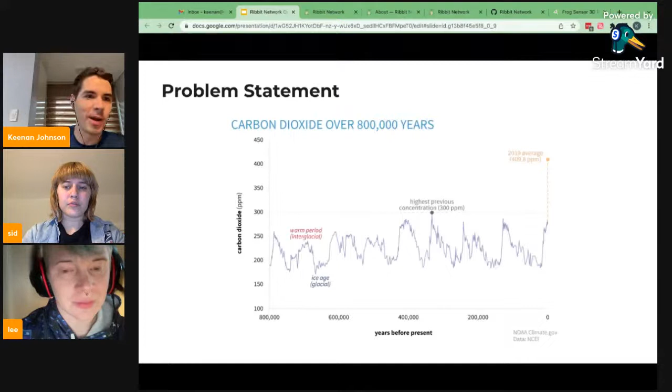And climate change is really interesting because we know exactly what is causing the problem. It's greenhouse gases. There's no real debate about that, and it's just about solutions. So at Ribbit, it's like, hey, we should have that future based on open data that allows everybody, citizen scientists, governments, corporations, to both take informed action, but then also be held accountable for that shared action, because climate change is this big shared resource for the earth that we live in.

Can you talk a little bit more about that idea of citizen science, and why is it important to you that individual people can have access to this data, as opposed to organizations that we trust and love?

Yeah, I think it's important for a lot of reasons. One is that we've known climate change is a problem for a really long time, and one of the reasons it's not solved is it's not any one entity or person's fault. It's this collective, really big systems problem—corporations have some part to play, us as individuals have some part to play, governments have some part to play. We've all historically been part of the problem, and we all need to be part of the solution moving forward.

And are there ways that individual people can look at this data that have a different vantage point or perspective than other organizations might?

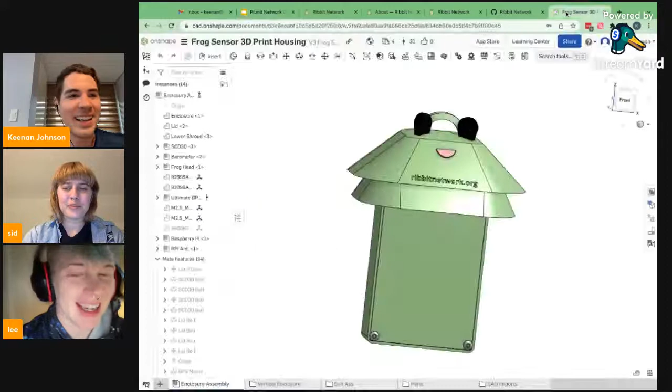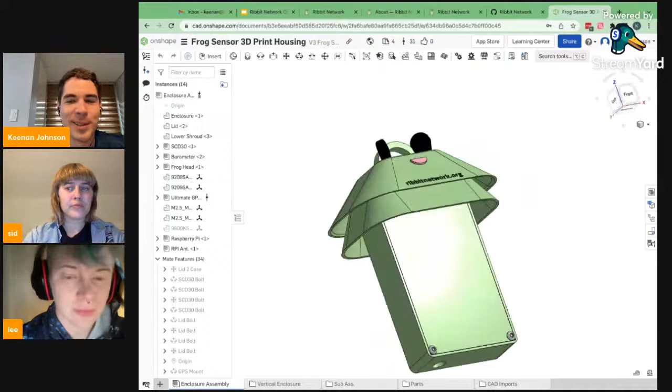We have all of the mechanical and electrical design files hosted and available. We use this program called Onshape, which is a great CAD tool for open source projects because it's freely available for public things. Anybody can use it for free in your browser, and you can go in and fork the mechanical design if you want, which is exactly the same as the GitHub concept of fork, and modify it and take it and make it your own.

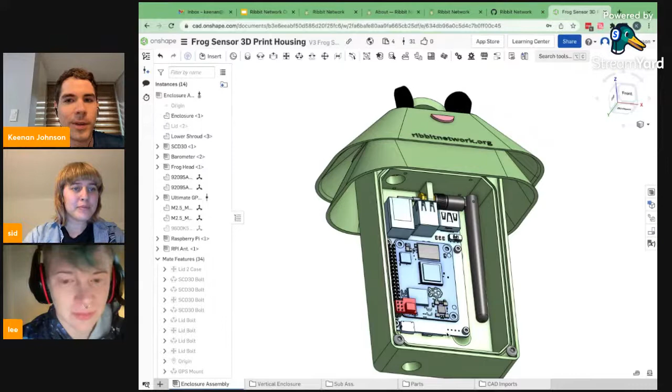So it's perfect, and we can peel this apart real quick. Inside of the frog, we have a classic single board computer. We use a Raspberry Pi CM4, so you can see it here on the carrier board alongside the big antenna. The big antenna is really important here.

The reason we use the CM4 today is because these sensors go outside, and oftentimes the Wi-Fi strength in citizen scientists' homes is not as strong outside as it is inside the home. So it's really nice that the CM4 has this good pre-certified high gain antenna from the FCC, which we can use.

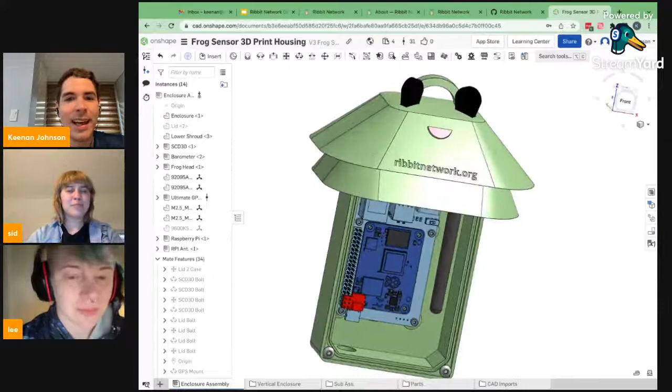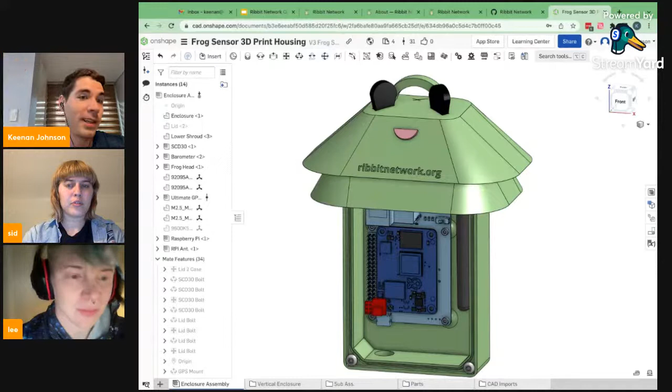Also just mentioning the enclosure here. We've designed it as a fully 3D printable enclosure. We recommend using a recycled PETG material, which is very similar to the material a water bottle is made of, and you can get good recycled versions of that. Equally, it's recyclable at the end of life, so it fits very nicely with the ethos of the project. And 3D printing is a nice lean manufacturing method that has almost no waste.

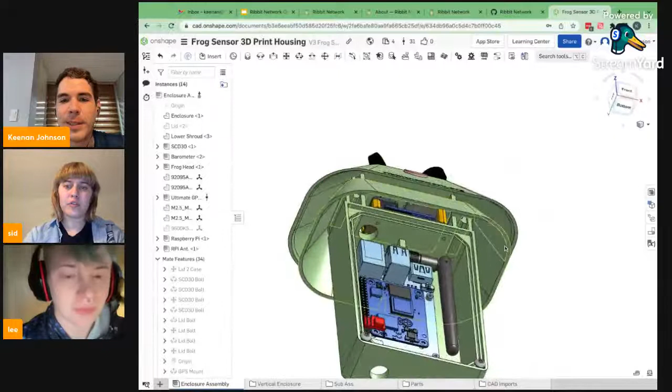If you look at the top, like the head of the frog here, you'll see it's got these interesting fins. The reason is we need to allow airflow up into the actual sensors of the frog, but we need to keep it protected from the rain and weather and solar radiation and everything.

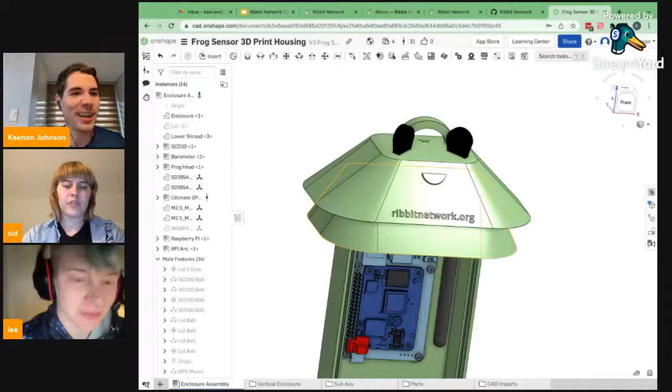This concept is called a Stevenson screen. If you type that into Wikipedia, it's this concept of having these layered overhangs, and it's been used in meteorology for a long time as the way you house outdoor sensors. It's a super cool idea, and historically it's been made of wood slats. We do it with 3D printing here, which is nice.

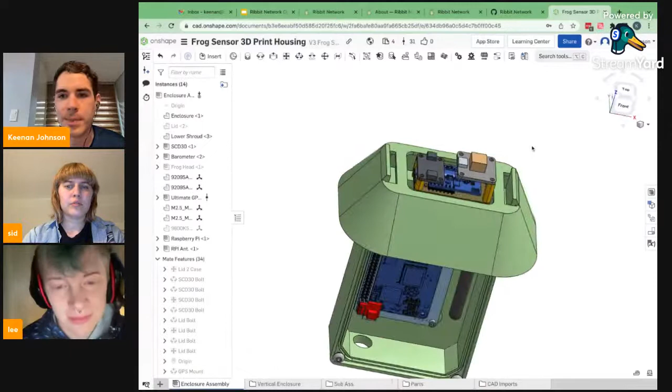That's really cool. Yeah, so they fit on top with these really nice clips that you can see as you take the enclosure off. And the top bit is where all the actual sensors are for the CO2, barometric pressure, humidity, and then a GPS sensor to locate the sensor spatially.

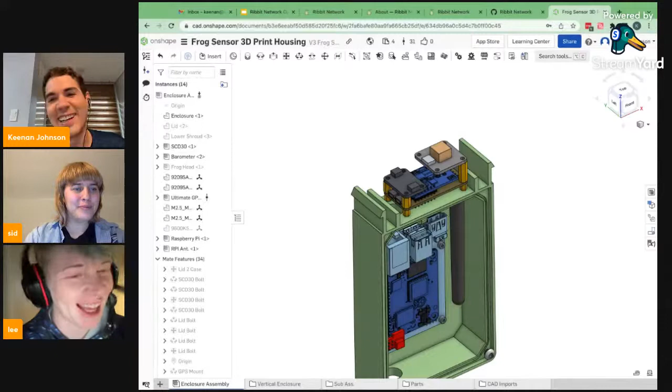The question's going to come up right now with the chip shortage. So the Raspberry Pi, what are your thoughts? The Raspberry Pi is great, but it has some real drawbacks, and that's the number one challenge the project has right now in terms of how do we deploy this: you cannot buy this Raspberry Pi easily.

Ribbit Network was very lucky. We were able to do a bulk purchase of some of the CM4s together, so you can buy a small amount of the Raspberry Pis through us today, but we have a limited quantity, and we know that that's a stopgap and it won't last very long.

So one of the big efforts we have right now is to re-implement all of our software onto a microcontroller, which is good because it lowers the cost and it's something we can source easily. We're trying to look at an ESP32 based design, and that's one of the big ongoing pushes on the technical side right now. I have one here — this is the ESP32 Feather S3 from Adafruit. This is probably the board we will go with, pending completion of the software, and the whole frog will probably get a lot smaller as that board decreases in size.

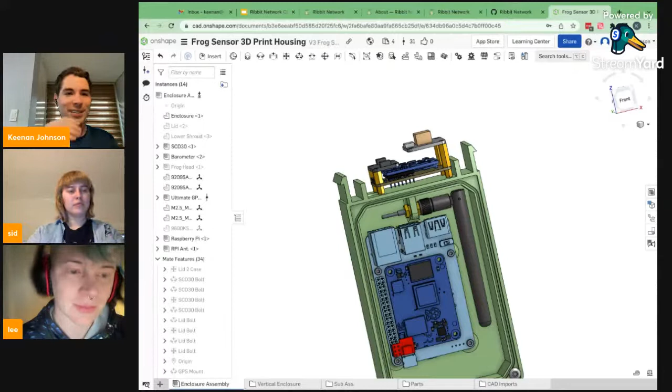The challenges of doing a big distributed remote IoT fleet that anybody can join with a microcontroller — there's a lot of software to be written that enables that. We've been really lucky to work with a partner called Balena, which is an open source IoT fleet management service.

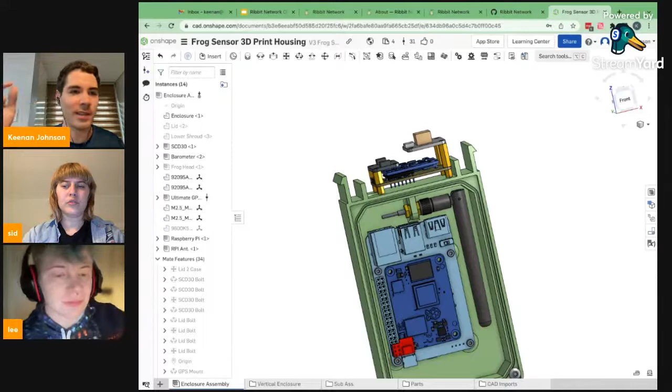They support single board computers like Raspberry Pi, and we have an open fleet with them, which is really awesome because it means anybody can image an SD card. We have instructions for how to do this on our GitHub — the frog sensors, all the hardware and software instructions are there.

As part of the assembly instructions, we've got good stuff here that talks all about how to 3D print your own sensor and everything.

As part of the software, it shows you how to add a new frog if you want, image an SD card, and join it up to our shared Ribbit Network fleet. Then everybody's software in the world gets our shared software updates.

Building that workflow for a microcontroller is not something we can use any existing solution for, so we have to build a lot of that infrastructure ourselves, which is the work we're doing now. If that's something you're interested in out there listening, come help us build it, because I think that's a really key enabler for the project right now.

That's a super interesting problem, and I'm sure some folks will come out of the woodwork with thoughts and opinions. How many people are in the network right now, or how many sensor units are there?

I think there's been about 40 or 50 or so that have been either built or deployed. If you go on our website, Ribbit Network, we've got a link to where you can view the live data. You'll see that the actual number of live sensors is quite less than that at the moment.

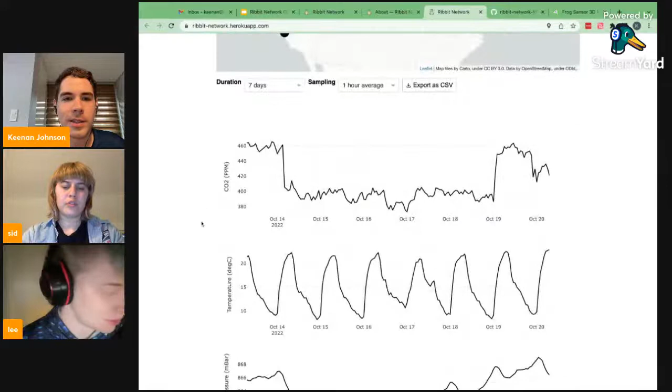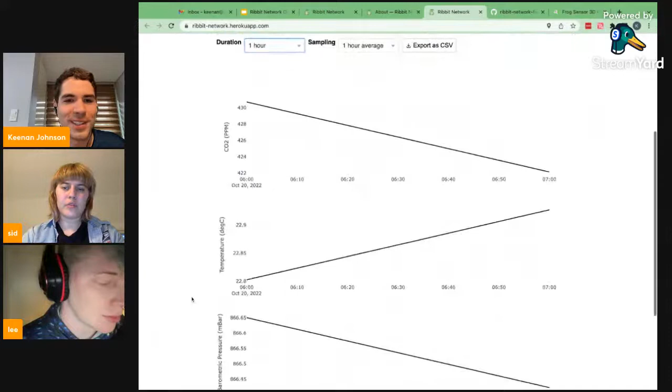But you can click on any one of the sensors on the map and get these nice plots about, okay, what's the CO2 related in the day, what's the temperature, barometric pressure. You can change the time scale of this to the hourly level if you'd like, or the one day kind of period, whatever you're interested in seeing. You can export that data if you'd like.

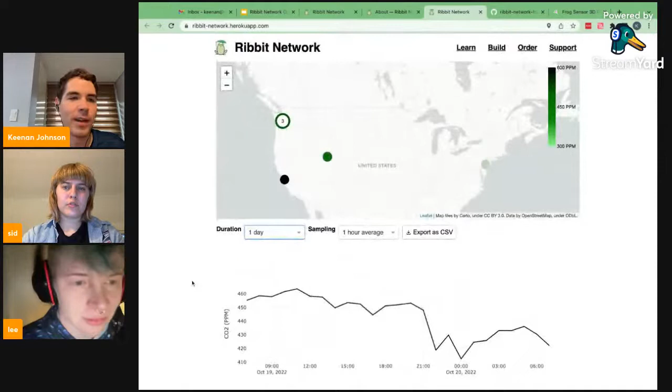One of the things we're trying to build out right now is a proper API to access this data, because that's going to be really important for research organizations, universities, or schools who want to gain access to this data and do some interesting analysis with it. We want to provide that. Right now we just have direct access to the database.

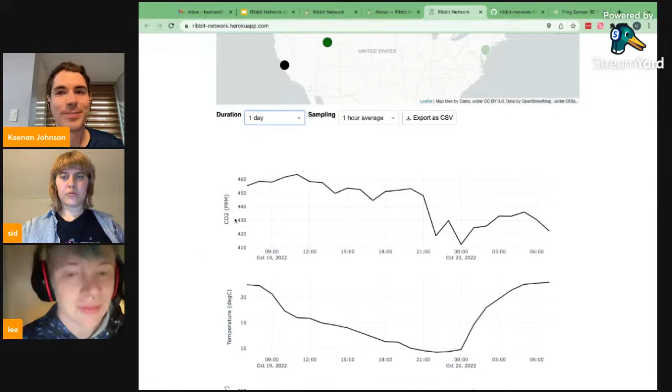This is all also on our GitHub. It's all open source. If you check out our dashboard, you'll find all the code and everything that powers this dashboard. We have a pretty simple stack, I would say, compared to a lot of modern web apps. So this will certainly get more complicated as we grow.

So we've got all our frogs kind of over here. We use InfluxDB, which is a really awesome open source project for time series data, as our database. And then sitting on top of that is this Dash app, which is basically a Flask app with this really awesome plotting library, Plotly, integrated into this framework called Dash, which makes it really easy to render those web pages with the nice graphics and maps and things.

That's awesome. You mentioned this a little bit already, but if you want to expand on other projects or open source communities that inspired you, or things that you're drawing on or maybe collaborating with.

Yeah, that's a good question. I think there's a lot of open source communities that I think are super inspiring. On the software side, there are a lot of really awesome active communities around development languages and technical implementations. I think we've taken a lot of inspiration from those in terms of how open source communities operate and what a community looks like that functions well. We're definitely still learning how that goes. But, for example, the concept of having a core team of maintainers, that's sort of a best practice that's come out of a lot of the open source community efforts.